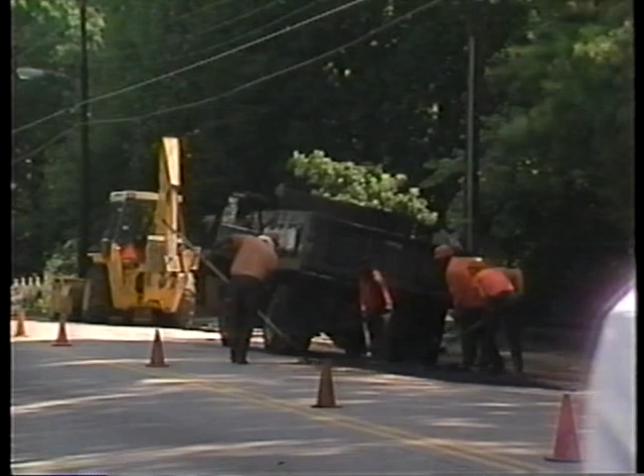Now, let's get started. Your safety and the safety of others is your primary concern when setting up traffic control. Whenever work is done on or near the roadway, drivers are suddenly faced with changing and unexpected conditions. If drivers are not properly warned of these changes, accidents can and will occur, so protective measures must be taken.

Liability is a second concern you should have when establishing a traffic control zone. Today, more than ever, work zone accidents are becoming courtroom lawsuits. These lawsuits usually result in large sums of money being awarded by public agencies to those injured. You should take note, though, that even employees are sometimes held liable for damages.

A third consideration when you're on the job is image. Not only is safety important at the work site, but so is the way the public sees you and your agency. A professional-looking work crew and properly installed traffic control devices will improve your agency's image and increase the traveling public's respect for your work zone.

So safety, liability, and image are 3 points you need to keep in mind when setting up traffic control at your work zone. You should also remember that drivers don't make distinctions between construction, maintenance, or utility operations, so we need proper traffic control for all types of work. Now, let's discuss some basic concepts that will help you do your job safely.

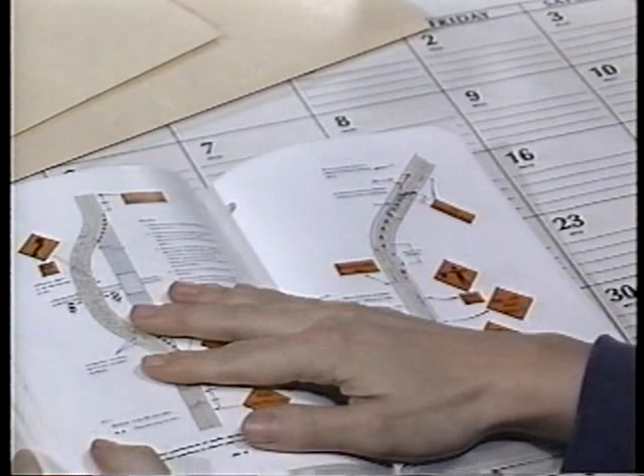To begin, you'll need access to the Manual on Uniform Traffic Control Devices. This manual is the national standard for all traffic control devices. It applies to all streets and highways open to public travel, and serves as the standard for state and local manuals. Part 6 covers traffic controls for street and highway construction, maintenance, utility, and incident management operations. It includes illustrations and layouts for several specific work zone applications.

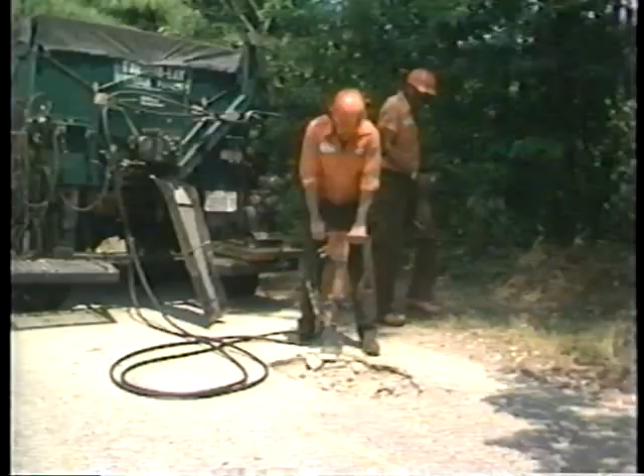Your state or local agency may have also prepared a supplemental manual showing additional specific applications and layouts. Many of the typical work sites you'll encounter are illustrated in the Manual on Uniform Traffic Control Devices. However, the manual does not cover every conceivable situation. Good engineering judgment must be used to determine the best traffic control for a particular work site. This will depend upon the type of work needed, the location and duration of work, the type of roadway, traffic volume and speed, and any potential hazards.

The principles which you should follow to improve the safety of motorists and workers in short-term work areas include the following. First, keep safety of motorists, pedestrians, and workers your top priority. Try to keep traffic conditions as normal as possible, and take the time to plan and install a traffic control scheme. Sometimes this may mean spending almost as much time setting up traffic control as you spend completing the work.

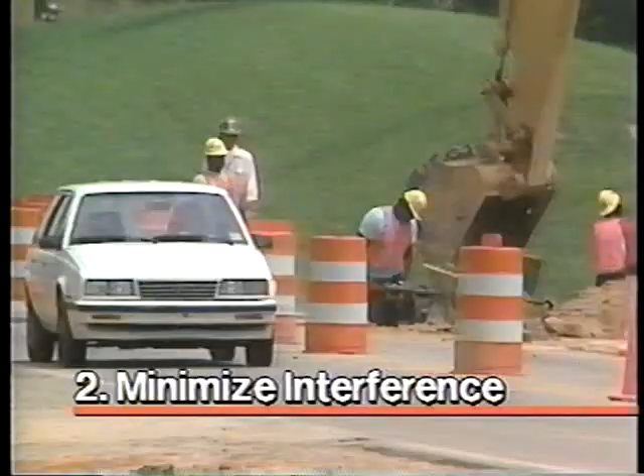Second, minimize interference with traffic movement. Try to maintain the safest maximum speed while eliminating abrupt lane closures. Also provide enough room for work equipment and vehicles inside of your work zone, and then open the roadway again as soon as possible.

Third, present a clear, easily understood message to drivers and pedestrians. This means knowing the exact meaning of each traffic control device that is used. It also means that any conflict in meaning between temporary control devices and those permanently in place must be resolved.

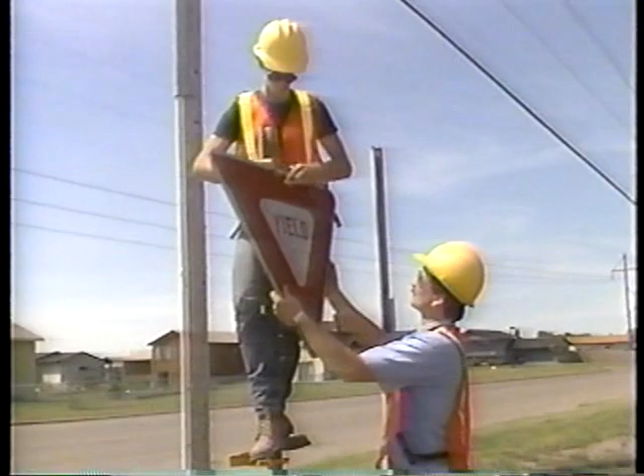For example, you may need to close a lane for maintenance. All of the normal road conditions may guide the driver into the closed lane. Therefore, a special effort must be made to overrule the regular message during the duration of the work.

Fourth, have a plan in mind before going to the work site. The foreman generally takes on responsibility for designing, installing, and maintaining the traffic control plan. This includes keeping the control devices in good repair and properly cleaned so that adequate visibility is maintained. As soon as the project is finished, you should promptly remove the traffic control devices.

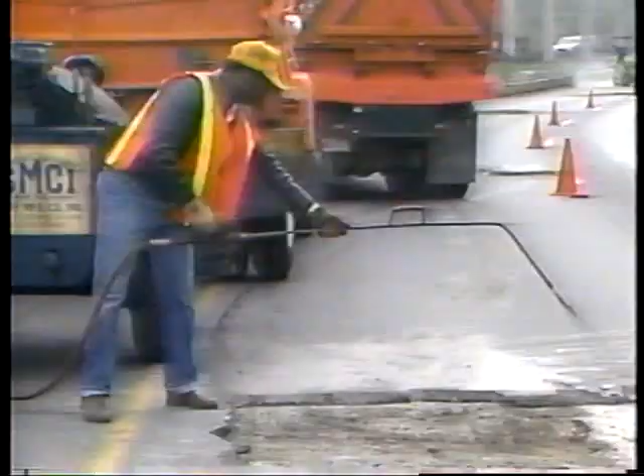Fifth and finally, anticipate the increased hazards caused by your presence on or near the roadway. Be sure to keep your equipment, materials, debris, and yourself out of the path of traffic. This means try to keep a clear roadside through the work area. Use traffic control devices that are lightweight and yielding to lessen vehicle damage.

The traffic control devices selected to assist motorists must satisfy a driver's need for information. You should carefully consider both the message and the placement of the traffic control devices. Inappropriate messages and incorrect placement of signs, markings, and other devices can mislead and confuse the motorist.

In work zones, there are 3 categories of messages which must be conveyed to the driver. These include the warning of potential hazards, information on safe speed, and the lane or shoulder over which a vehicle should be traveling.

Drivers have particular problems when traffic control devices give inaccurate information, do not conform to standards, or are improperly installed.

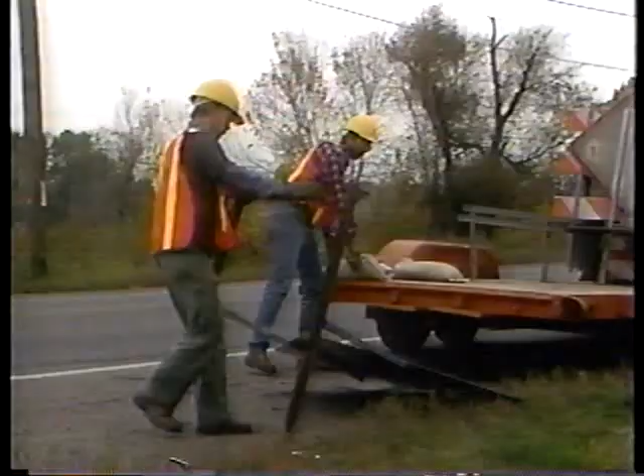Each person whose actions affect maintenance and construction zone safety should receive training. They must know the following principles. Keep the motorist's respect and the agency's credibility by presenting clean and well-maintained traffic control devices.

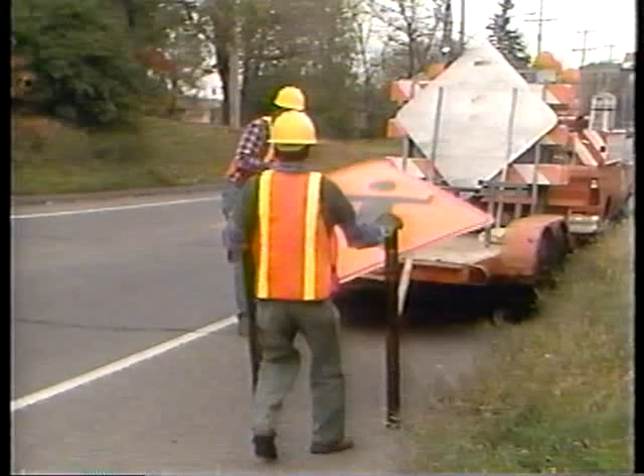If work is not in progress or a hazard is not there, take down, fold over, or cover the signs. Don't mislead the public. Remove channelizing devices when no longer needed. Don't tell drivers to expect a hazard that's not there. If you do, they may not believe other signs and devices used on the project. For example, don't use this sign unless flagging is actually taking place.

Put yourself in the driver's seat and see how the traffic control looks to you. Maintain the controls as if every driver were approaching the area for the first time, especially in short-term work sites.

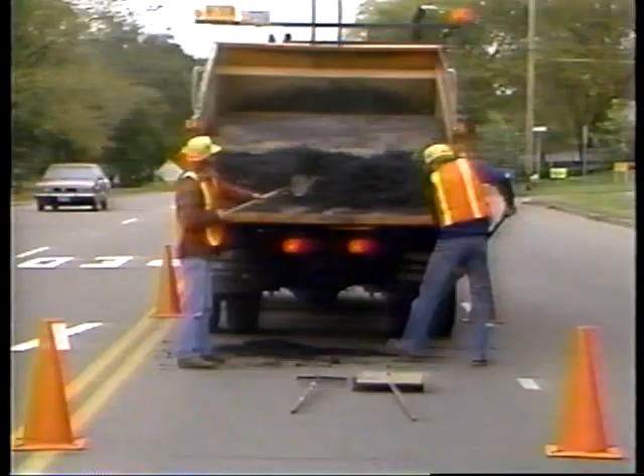Discuss and think about good work area traffic control. Help your co-workers perform their work with a minimum of exposure to traffic while watching for problems and reporting any damaged or missing devices.

Now, let's review what we've discussed in this introduction to work zone safety. Here are the main points to remember.

Part 6 of the Manual on Uniform Traffic Control Devices is the standard for traffic control in your work zones. It may be supplemented by state and local manuals, which should be consulted before setting up a work zone. Plan your traffic control before going to the work site. Good planning includes carrying the proper signs, cones, and other devices needed to safely do the job. Be sure they're clean and in good repair.

Only display those devices that are needed by the driver. If a work zone traffic control device is not needed, remove, cover, or lay it down as soon as possible. Don't mislead the public. Always ask yourself, how does it look to the unsuspecting driver approaching my work site? What's the driver's view?

We've taken a look at the reasons for proper traffic control and its relationship to safety in the work zones. Now, in the following parts, we'll be reviewing the concept of traffic control zones, the types and uses of traffic control devices, and we'll be reviewing some typical applications that you'll be using in your work.

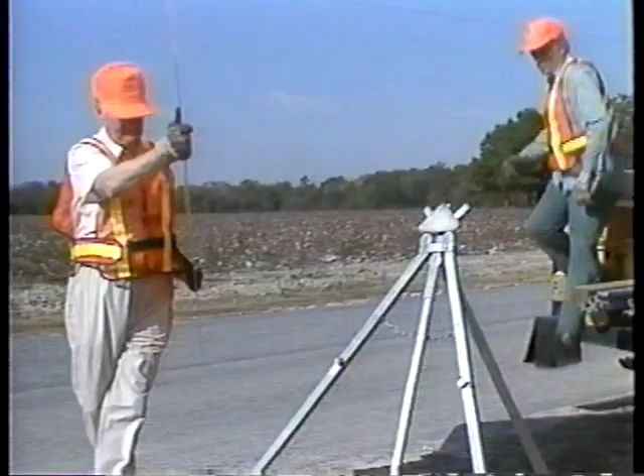At the beginning of the work area, start with an advanced road work ahead sign. Then use signs with more specific messages, with the most specific sign stating what action should be taken by the driver closest to the work area. Drivers sometimes forget what they're told, so the last sign in the advanced warning area should tell them specifically what to look for or expect, such as a flagger or a right lane closure ahead.

The message ahead is generally used on warning signs for short-term work sites. The overall effect of the signs should make the driver aware of what he or she is approaching and what action will be required.

In keeping with the Manual on Uniform Traffic Control Devices, a rule of thumb for spacing between signs in a series is 200 feet for low-speed city streets, 350 feet for high-speed urban roads, 500 feet for rural roads, and 1,000 to 2,640 feet for freeways and expressways.

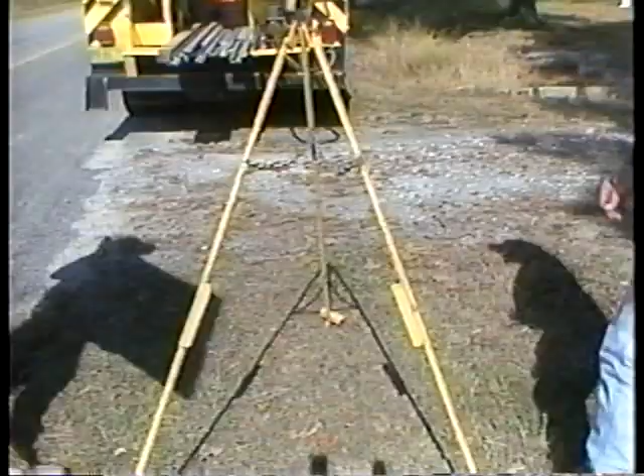Lightweight, yielding, or breakaway supports should be used for all sign installations. Sign installations should be reviewed to avoid any possible glare from vehicle headlights.

The minimum height requirements for signs attached to posts is shown. Signs on portable supports are required to be at least 1 foot above the roadway. All signs used at night are required by the Manual on Uniform Traffic Control Devices to be retroreflective or externally illuminated. Lighting from existing streetlights does not meet this requirement.

Pavement markings are very important in guiding traffic through work zones. Pavement markings, delineators, and channelizing devices outline the traffic path around a work area. Drivers use pavement markings as a primary means of guidance.

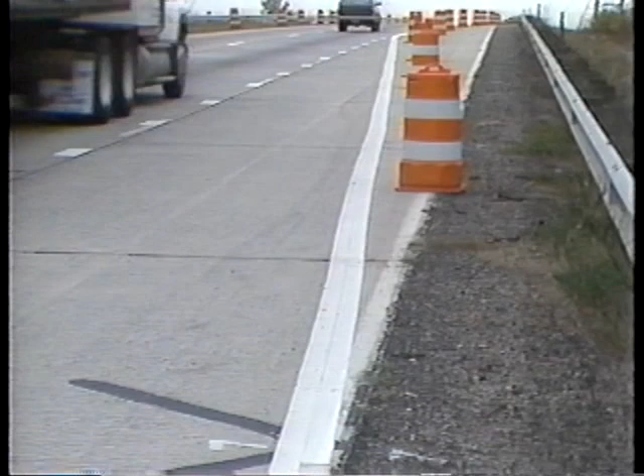The standard markings planned for the road should be in place before opening a new facility to traffic. Also, if revised lane patterns are planned for the work zone, interim markings should be placed before the traffic is changed. Where this is not feasible, such as during the process of making a traffic shift or carrying traffic through surfacing operations, temporary delineation may be accomplished with lines of traffic cones, other channelizing devices, or short strips of adhesive-backed retroreflectorized tape.

When pavement placed during the day is to be open to traffic at night, and permanent striping cannot be placed before the end of the workday, an interim stripe should be applied to indicate to the driver the location of the lane or center line.

Channelizing devices are used to warn and direct traffic away from or around a work area. They also control the flow of traffic when separating two directions of travel. They include barricades, barriers, vertical panels, cones, tubular markers, and drums. Each type has distinct visibility characteristics and advantages.

The Manual on Uniform Traffic Control Devices requires that channelizing devices used at night be retroreflectorized with a material having a smooth, sealed outer surface. This includes commercially available retroreflectorized sheeting and tape strips. It does not include the use of pavement marking tape.

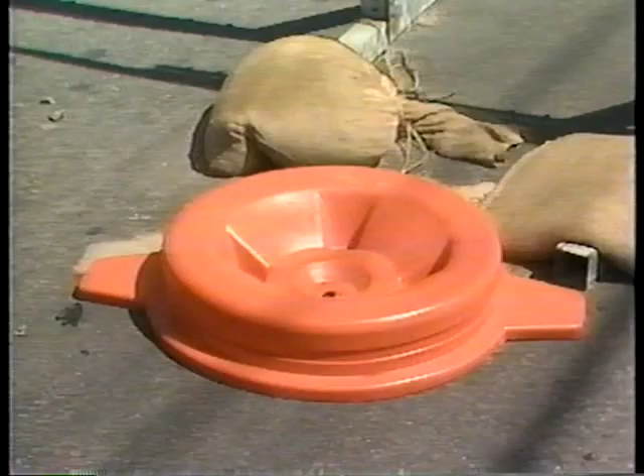Some devices are easily knocked down and require a weight, such as a sandbag. These weights must be placed at the bottom of the device for stability and to keep the weight from being thrown if hit. Neither the device nor the weight should cause excessive damage when struck. Sandbags should not be placed where they will be a hazard to the driver or limit the view of the device.

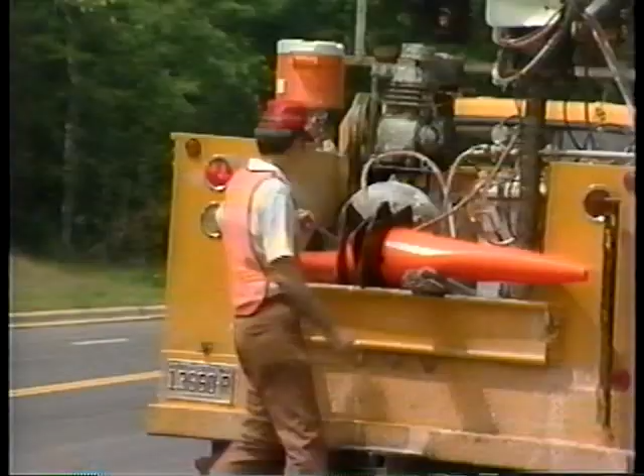Cones are lightweight channelizing devices that may be stacked for storage. They are easy to place and remove and are a minor impedance to traffic flow. For stability, a rubber or sand collar or a specially weighted base may be added. When purchasing cones, specifications may require 60% or more of the weight in the base, thus removing the need for extra base weights or collars.

Cones cause little or no damage when hit. They must be at least 18 inches high, but 28-inch cones must be used on freeways and other roadways where speeds are 45 miles an hour or greater. At night, 28-inch cones or larger must be used. 28-inch cones must have a 4-inch wide band, 2 inches below a 6-inch band. Any cone height less than 28 inches is not acceptable for nighttime use.

Using cones can have disadvantages because drivers have less respect for them, and cones can be easily displaced or knocked over unless properly ballasted. When cones are used, they should be checked periodically, and those that have either been displaced or knocked over should be reset.

Tubular markers are similar to cones in that they are lightweight, easy to install, and are a minor impedance to traffic flow. Tubular markers may be set in special weighted bases or fastened directly to the pavement. Because of their narrow size, they offer a particular advantage when forming new lanes or separating two-way traffic for a short-term activity.

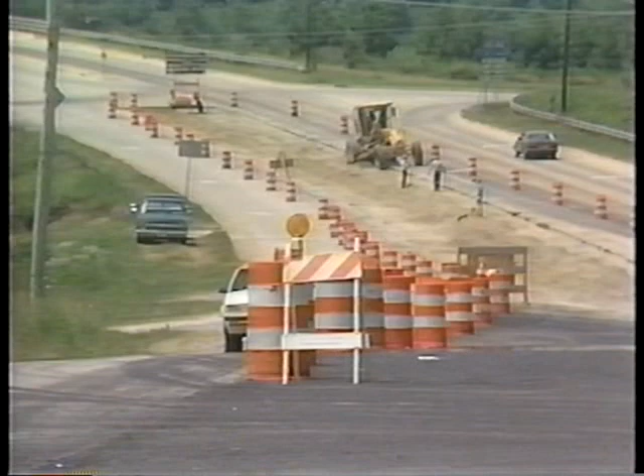Drums are used as either channelizing or warning devices. They are highly visible, give the appearance of being formidable objects, and therefore command the respect of drivers. Plastic, not metal drums, shall be used.

The Manual on Uniform Traffic Control Devices requires that markings on a drum be horizontal orange and white stripes that are retroreflectorized 4 to 6 inches wide.

The drum must have at least 2 sets of orange and white stripes, but can have non-retroreflectorized spaces up to 2 inches wide between the stripes.

Drums must have a minimum width of 18 inches, regardless of orientation, and their tops shall be closed.

Plastic drums can be nested, allowing for easy transport and storage. Many of the commercially available plastic drums have 1 or more flat sides to prevent rolling and have flanges or recesses for warning lights.

Barricades should be constructed of lightweight materials and are classified as types 1, 2, and 3. The type is determined by the number of retroreflectorized rails facing traffic.

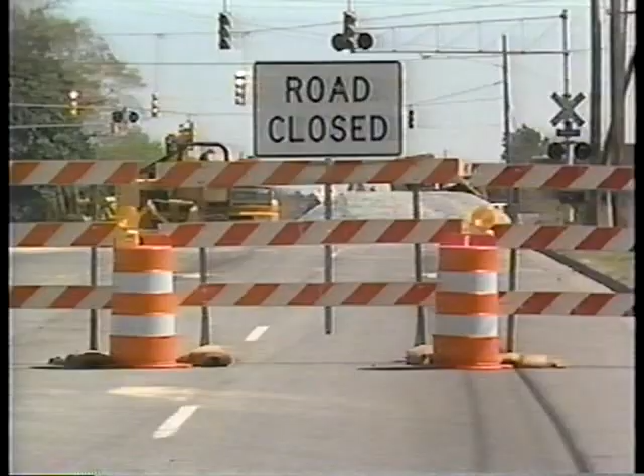Types 1 and 2 are portable and can be used for either channelizing or marking hazards. Type 3 barricades are used for road closures.

Types 1 and 2 often have rails on both sides and may be used to separate opposing lanes of traffic. The rails have alternating orange and white retroreflectorized stripes that slope down toward the side traffic is to pass.

For road closures, a road closed sign and a detour sign, if needed, may be mounted on a Type 3 barricade. If local traffic will be allowed to use the closed roadway, then the local traffic only sign should be mounted on the barricade.

The terms barrier and barricade are frequently confused. A barricade indicates the location of a hazard or a desired path a motorist should take. On the other hand, a barrier provides a positive physical separation between traffic and the work area or between opposing streams of traffic.

High-level warning devices are tall portable stands with flags that are visible above the traffic and parked cars. They have a minimum of 2 orange flags, 16 inches square or larger, at least 8 feet above the roadway.

The devices may be used with a sign or flashing light attached, or they may be attached to vehicles used in mobile work operations.

Most of the warning lights in use are portable, lens-directed enclosed units and may be used on channelizing devices, barricades, and signs. These are the principal types and uses of warning lights.

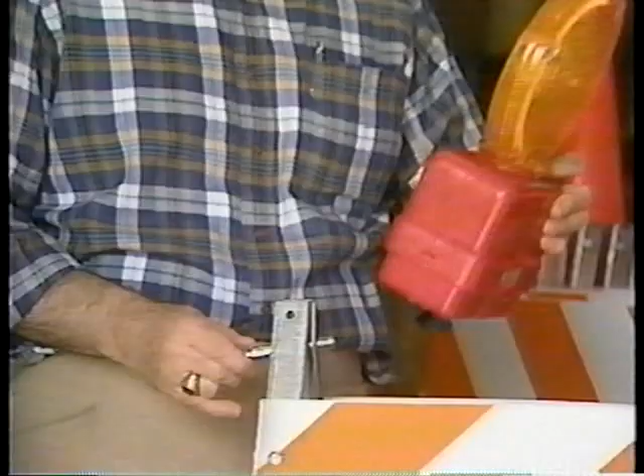Warning lights should be secured in such a way that they'll not separate from the channelizing device or sign when hit by a vehicle. Warning lights that come loose during an accident may become dangerous flying objects.

Work vehicles in or near the traffic areas are hazards and should be equipped with flashing lights. The vehicle warning may be emergency flashers, flashing, strobe, or rotating beacons.

High-intensity lights are effective both day and night. The flashing lights should meet the requirements of the agency that has jurisdiction over the street or highway. These lights should be used in addition to other channelizing and warning devices.

However, in some emergency situations where the work may be in progress for a very short time, these lights may be the only warning device.

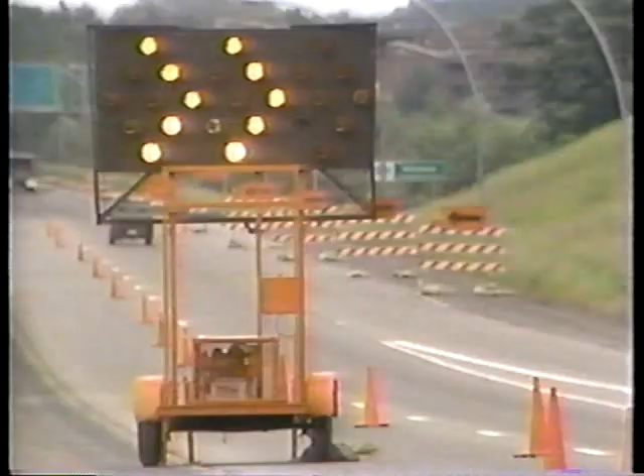Arrow displays are signs with a matrix of lights capable of either flashing or sequential displays. They are used for moving traffic out of a lane and may be used at tapered lane closures and with mobile operations. They are not a substitute for a lane closure taper.

There are two types of arrow displays: flashing and sequencing.

Arrow displays have four basic operating modes: left arrow, right arrow, left and right arrow,

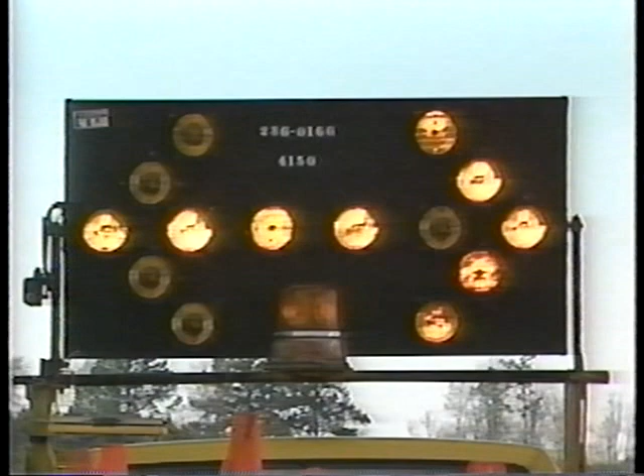and caution mode, with 4 lamps arranged in the 4 corners of the panel.

Flashing arrows must never be used on 2-lane roadways because traffic may be directed into a head-on collision. Arrow displays on 2-lane roads can only be used in the caution mode.

Flashing hazard identification beacons are used in work areas, both day and night, to alert drivers of a critical point in the highway, such as a truck crossing, and have the same meaning as permanently mounted beacons. Flashing beacons are not used for channelization.

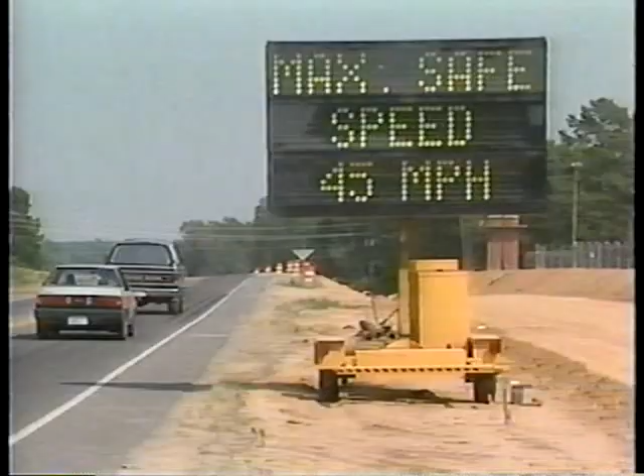Portable changeable message signs capable of displaying various messages to the motorist will sometimes help construction zone signing. These devices are normally trailer or truck mounted and have their own power system. Because they're expensive to buy and operate, changeable message signs are normally used for the more complex traffic control plans.

When using a changeable message sign, be sure the message is clear. A lengthy message may distract the motorist too long. The word order in a message can also cause problems. For example, 'right lane closed, merge' would get a different driver response than 'lane closed, merge right.' Yet the messages are similar, except for the beginning point.

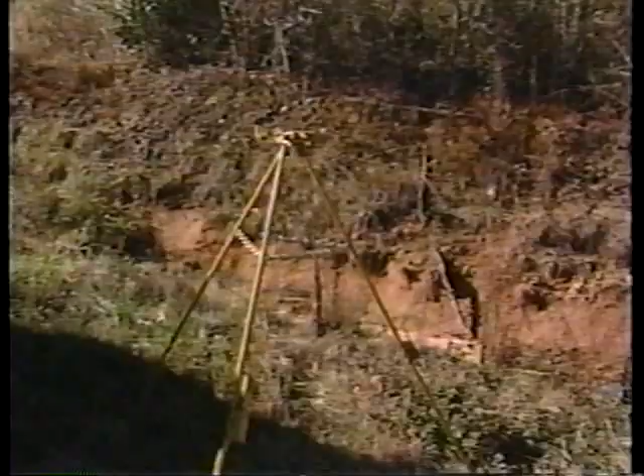This concludes our brief review of traffic control devices. Particular details will be found in the Manual on Uniform Traffic Control Devices. Now, in the following section, we'll be discussing the concepts and elements of traffic control zones.

When traffic is affected by construction, maintenance, or utility operations, traffic control is needed to safely guide and protect motorists, pedestrians, and workers in and through work zones. This zone is the area between the first advance warning sign and the point beyond the work where traffic is no longer affected. Most temporary traffic control zones can be divided into 4 areas.

In this part of the training, we'll look at each of the areas and examine them for one direction of travel. If the work you'll be doing affects more than one direction of travel, the same principles we cover here will apply to traffic in all directions.

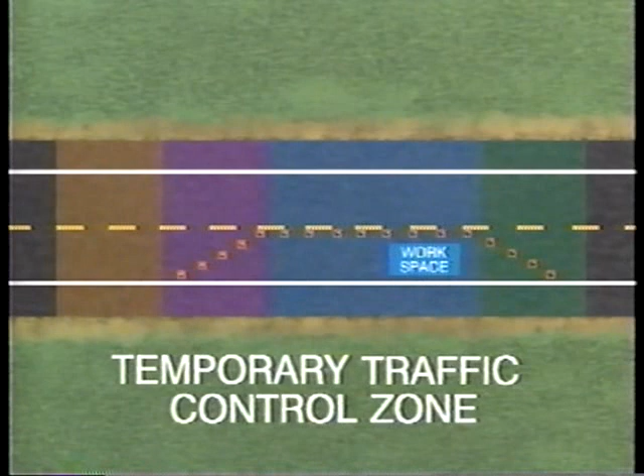These are the 4 areas of temporary traffic control zones we'll be discussing. Accidents can occur in all of these areas if they are not properly controlled: advance warning area, transition area, activity area, and termination area.

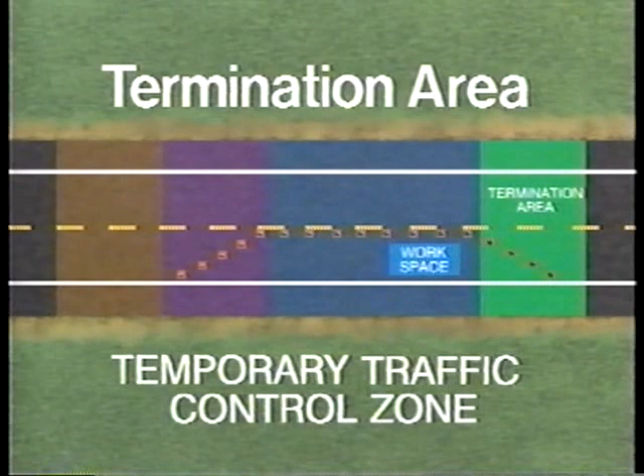The advance warning area prepares drivers and alerts them to what's coming. An advance warning area is necessary for all traffic control zones because drivers need to know what to expect. Before reaching the work area, drivers should have enough time to adjust their driving patterns. In the advance warning area, traffic control devices may vary from a series of signs starting a mile in advance of the work area to a single sign or flashing lights on a vehicle.

The advance warning area, from the first sign to the start of the transition area, should be long enough to give the motorist enough time to respond to the control devices. For most operations, the length can be 1 mile for freeways or expressways, 1,500 feet for most other roadways or open highway conditions, or 1 block or more for urban streets.

Next is the transition area. When work is performed within 1 or more traveled lanes, a lane closure is generally required. In the transition area, traffic is channeled from the normal highway lanes to a new path, which is required to move traffic around the activity area. Most often, this is accomplished with tapers to close the lanes.

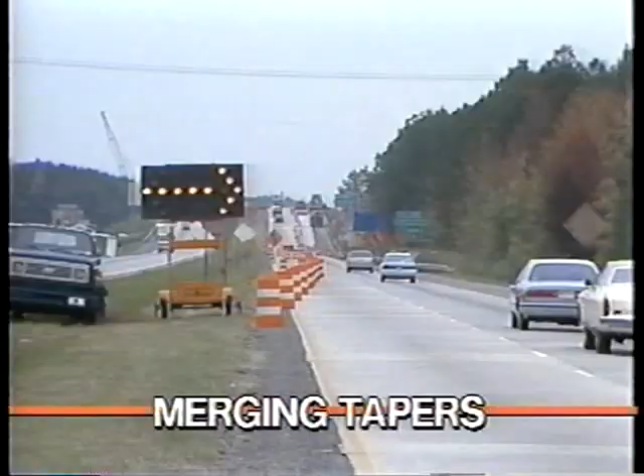A taper is a series of channelizing devices placed at an angle to move traffic out of its normal path. There are 5 general types of tapers used in traffic control zones. Merging tapers close a lane of moving traffic on multi-lane highways where a merge is required. The spacing for channelizing devices should not be greater than the speed limit.

Lane shift tapers move traffic to a different lane where a merge is not required. Shoulder closure tapers are needed to close shoulder areas. Two-way tapers control two-way traffic where drivers are required to alternately use a single lane; these tapers are used when flaggers are present. Downstream tapers are those installed to allow traffic back into the normal path.

The length of each type of taper is very important and is determined by several factors. Let's look at each of these factors in more detail.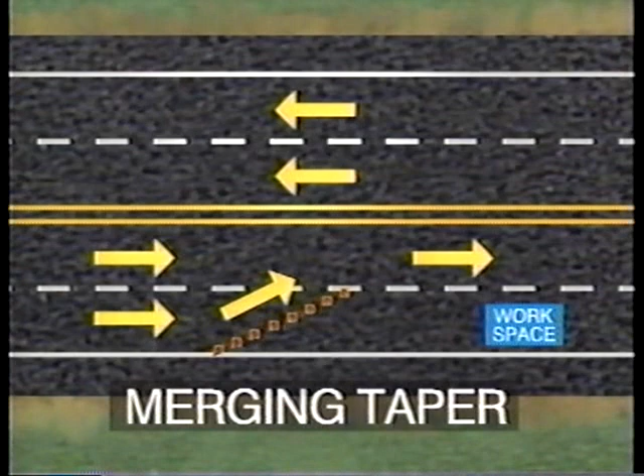The length of a merging taper, which is used to close a lane, is determined by the speed of traffic and the width of the lane to be closed. The 2 formulas for determining the length of tapers for lane closures are discussed in the Manual on Uniform Traffic Control Devices. For speeds of 45 miles per hour or greater, the merging taper length should be at least the width of the lane multiplied by the posted speed or the observed operating speed.

For speeds of 40 miles per hour or less, the length of the taper should be at least the product of the width of the lane times the square of the posted speed, divided by 60. This is actually the high-speed taper multiplied by the factor of the posted speed divided by 60. In most tables, the equation is shown like this.

Most state and local manuals include tables showing the required taper lengths for various speeds and lane widths. For example, a 40-mile-per-hour posted speed and an 11-foot lane requires a 295-foot merging taper.

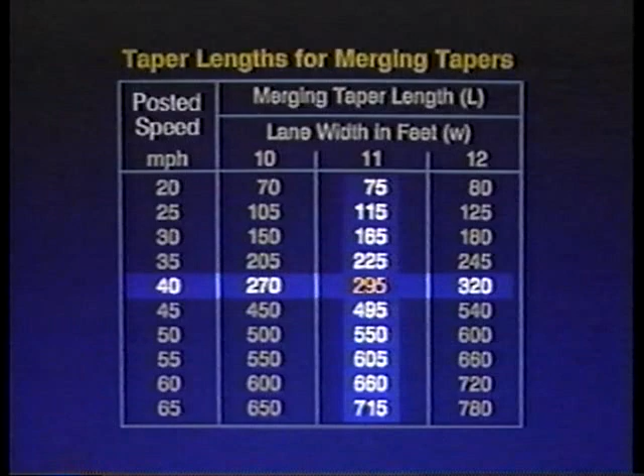The lane shift taper is used when traffic is only being shifted and no merge is required. Therefore, the taper does not have to be as long as a merging taper. The minimum taper length is 1/2 L, where L is the computed length of a merging taper for the given posted speed and width of the lane shift.

When an improved shoulder having a width of 8 feet or more is closed on a high-speed roadway, it should be treated as a closed part of the roadway. This is because drivers expect to be able to use the shoulder in the event of an emergency. The shoulder taper should be 1/3 L, where L is the shoulder width multiplied by the posted speed. If the shoulder is used as a travel lane, however, the taper is equal to L.

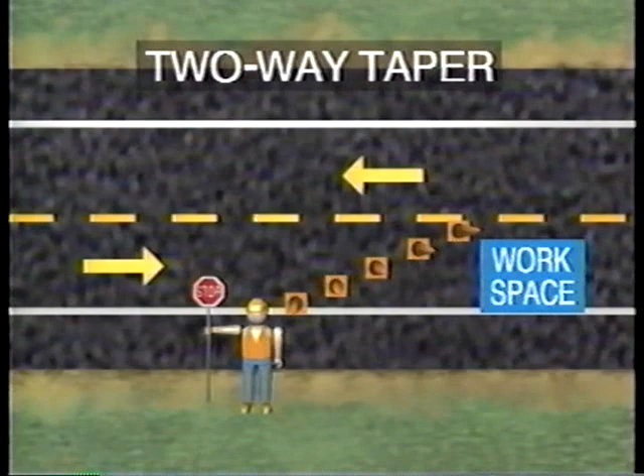The two-way traffic taper is used in advance of a work area that occupies part of a two-way road when the remainder of the road is used alternately by traffic in either direction. A short taper is used to slow down traffic by giving the appearance of restricted alignment. One or more flaggers or temporary traffic signals are used to assign the right-of-way in such conditions. Two-way traffic tapers should be a maximum of 100 feet long, with channelizing devices spaced at a maximum of 20 feet to provide clear delineation of the taper.

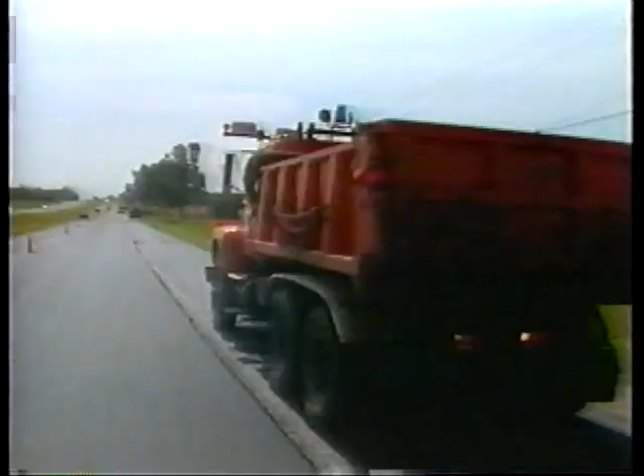A downstream taper is used at the downstream end of the work to allow drivers back into the lane that was closed. It's placed in the termination area. While closing tapers are optional, they may be useful in smoothing traffic flow. However, they may not be advisable when material trucks move into the work area by backing up from the downstream end. If a closing taper is used, it should be at least 100 feet in length per lane.

Here is a table from the Manual on Uniform Traffic Control Devices that shows the lengths for the 5 types of tapers.

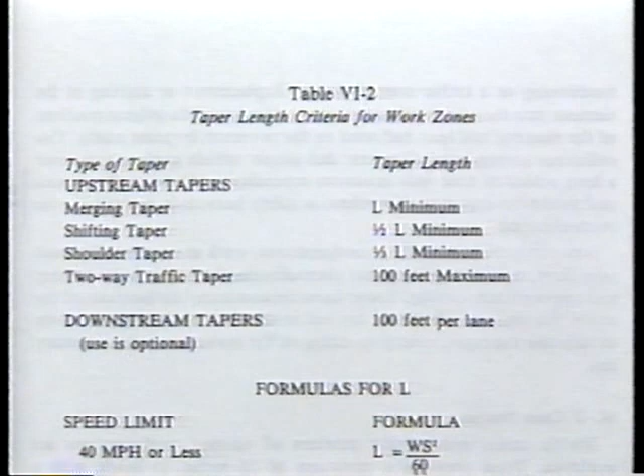Let's briefly review tapers and taper lengths. Where traffic on a multi-lane highway must merge, the required length is a function of the speed limit and the lane width. If traffic on a multi-lane road is to be shifted to a different lane, the taper is 1/2 the length of the merging taper length.

When working on an improved shoulder, the required taper length is 1/3 of the merging taper length. Now, when traffic is on a two-way road and it's reduced to one lane, a taper with a maximum length of 100 feet is needed. And to let the driver know that he may return to the closed portion of the roadway, a 100-foot taper may be used.

If restricted sight distance is a problem, for example, a sharp vertical or horizontal curve, the taper should be moved well in advance of the obstructed view. Beginnings of tapers should never be hidden behind curves.

Traffic should be observed to see if the taper is working correctly. Frequent use of brakes and evidence of skid markings are indications that either the taper is too short or the advance warning is inadequate.

The activity area consists of 4 distinct spaces. They are the longitudinal and lateral buffer spaces, the workspace, and the traffic space.

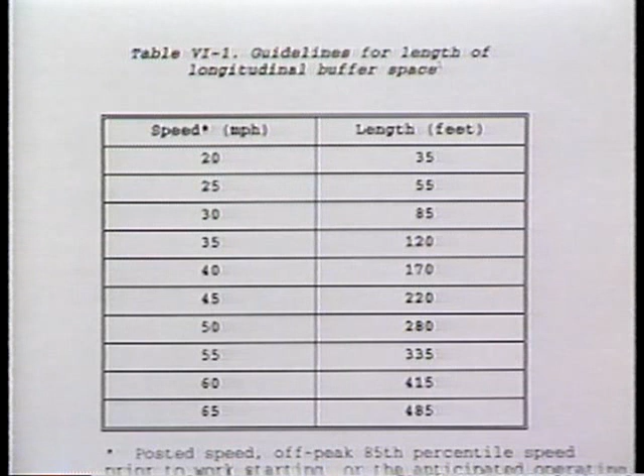The length of the longitudinal buffer space is based on the stopping distance for the speed being considered. Table 6-1 of the Manual on Uniform Traffic Control Devices provides guidelines for the length of buffer spaces for various speeds. It is measured from the end of the transition area to the beginning of the workspace.

Situations occur where one lane of traffic uses a lane that normally flows in the opposite direction. In these situations, a longitudinal buffer space should be used to separate the 2 tapers for the opposing directions of traffic to help prevent head-on collisions.

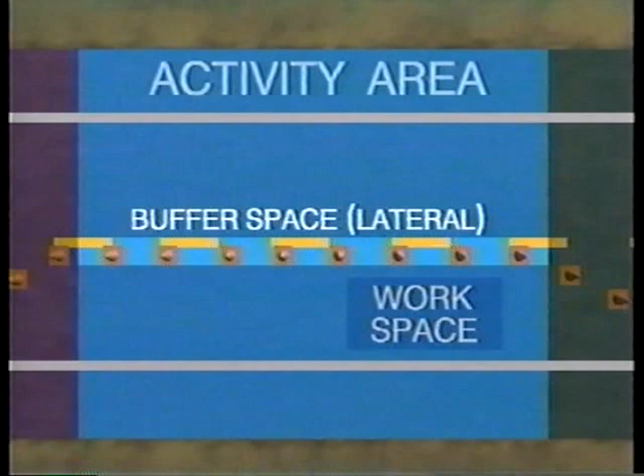Lateral buffer spaces separate moving traffic from the workspace as well as opposing streams of traffic. The width of this space is determined by engineering judgment and is often governed by the portion of the roadway which is needed to perform the actual work.

The workspace is that portion of the roadway which contains the work activity. It is closed to traffic and set aside for exclusive use by workers, equipment, and the storage of construction materials. Workspaces may remain in fixed locations or may move as work progresses. For long-term operations, the workspace may be shielded by barriers to exclude traffic and pedestrians.

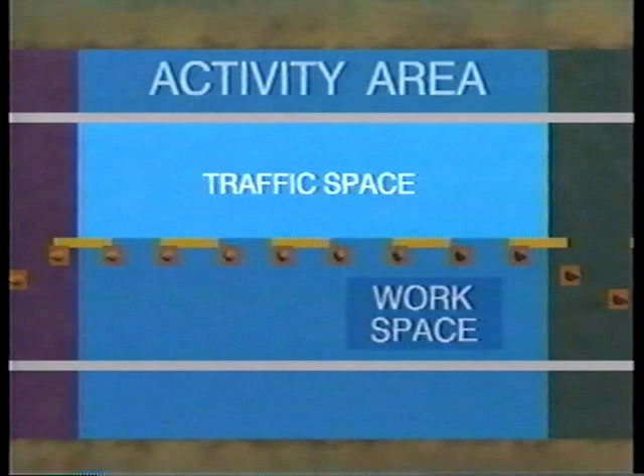The traffic space is the portion of the roadway in which traffic is routed through the activity area. Channelizing devices are used to separate the traffic space from the work activity at a spacing no greater than twice the posted speed limit. Every feasible effort should be made to minimize traffic conflicts with the work area. These are suggestions.

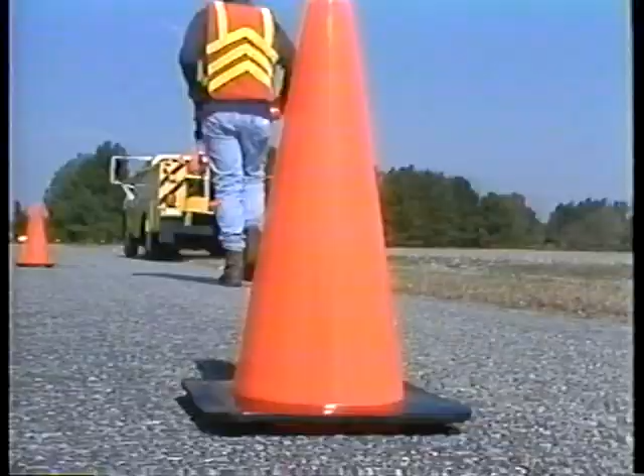Use traffic control devices to make the travel path clearly visible to drivers. For nighttime operations, the traffic control devices must be retroreflectorized and have a large surface area. Place channelizing devices between the work area and the traveled way. Provide safe entrances and exits for work vehicles. Flags and flashing lights should be considered on work vehicles exposed to traffic, and a truck-mounted attenuator be provided whenever possible to protect work crews.

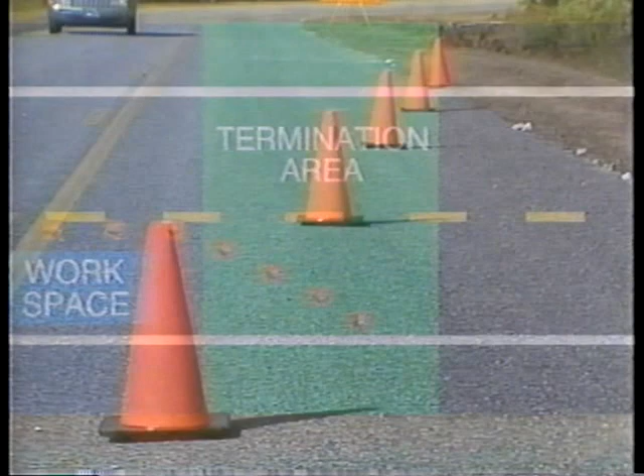The termination area provides a short distance for traffic to clear the activity area and return to the normal traffic lanes. It extends from the downstream end of the activity area to the End Road Work sign. A downstream taper may be placed in the termination area.

For some work operations, such as a single location utility or maintenance repair, it may not be necessary to display an End Road Work sign because it will be obvious to drivers that they have passed the activity area. Avoid gaps in the traffic control at work zones that may falsely indicate to drivers that they have passed the activity area. For example, if the work includes intermittent activity throughout a 1-mile section, drivers should be reminded periodically that they are still in the work zone.

The primary purpose of the guide sign, Road Work Next Miles, is to inform the driver of the length of the work zone. It should not be erected until work begins.

In mobile operations, the advance warning area may be provided by signs and flashing lights on the work vehicle. Additional advance warning signs may be warranted depending on the volume and speed of the traffic. A shadow vehicle equipped with an arrow display and flashing lights may also be used.

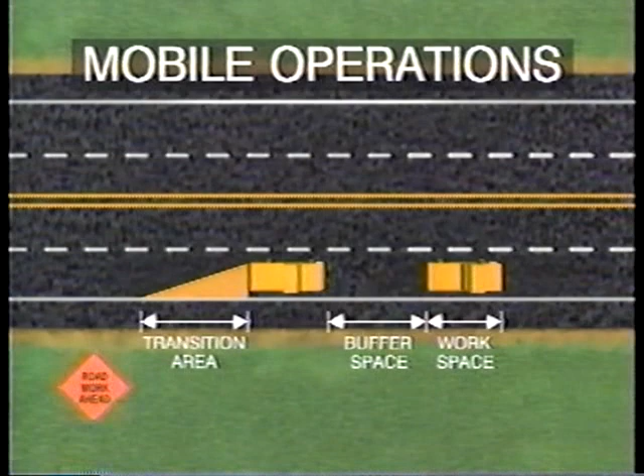With mobile operations, the transition area actually moves with the activity area, and the buffer space is the area between the shadow vehicle, if one is used, and the work crew. The termination area is usually obvious to the driver passing the work vehicle. The use of a truck-mounted attenuator should be considered for mobile operations.

As a review, these are the 4 parts of a traffic control zone. The advance warning area alerts the driver that there's something ahead that demands his close attention. In the transition area, traffic is shifted or moved to eliminate interference with work activities. The length of the taper should be computed or obtained from a table.

The activity area is set aside for the actual work to be performed, to provide for the movement of through traffic, and to offer a margin of safety for both workers and motorists. And the termination area tells the motorist that they are out of the construction area and may resume normal driving. This concludes the review of the 4 basic parts of a temporary traffic control zone and their function. In the next session of the series, we'll be reviewing some typical applications that you'll be using in your work.

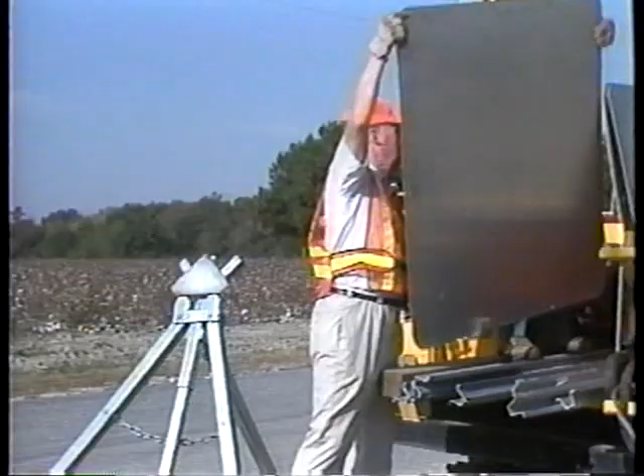You are probably most vulnerable during the installation of the traffic control devices. To minimize this hazard, install the devices before work begins, starting with the first device the driver will see when approaching the area. Then continue installing devices, advancing toward the work area.

To evaluate any work zone traffic control, drive through the work zone after all the devices are in place. Difficult as it is, put yourself in the place of the unfamiliar driver, the one who's not anticipating that you're in the roadway.

If the traffic control scheme gives the driver the necessary warning and guidance, you and your co-workers will be providing the best protection for yourselves while working on or near the roadway.

As soon as the work is completed, remove the traffic control devices in the reverse order of installation, starting with the termination area and proceeding back to the first device installed. A good technique for removing the control devices is to first place them on the shoulder of the roadway and then pick them up in the direction of traffic flow.

The best way to illustrate these principles is to show the installation of the control scheme for some common types of operations.

In the first example, the work is entirely beyond the shoulder or parking lane. Traffic control will generally consist of flashing vehicle lights and flags. An advance warning sign should be used when the work will interfere with traffic in any way.

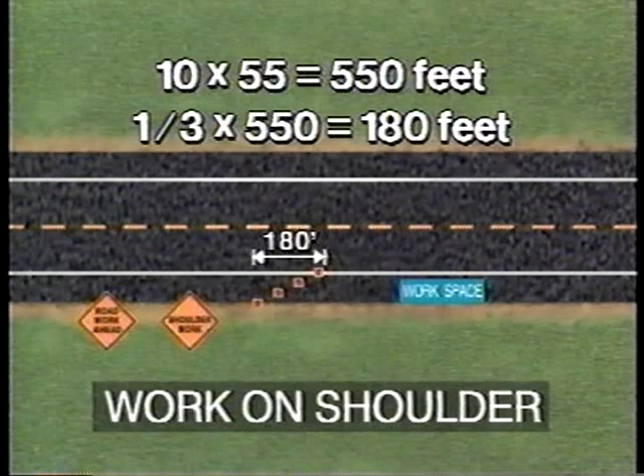Remember that the lane closure taper length is the product of the lane width and posted speed limit for speeds over 45 miles per hour. Let's assume a 55-mile-per-hour posted speed and a 10-foot shoulder. The lane closure taper would be 10 times 55, or 550 feet. The shoulder closure taper is therefore 1/3 of this, or approximately 180 feet.

A buffer space should be provided in advance of the workspace. When work is on the shoulder or takes up part of a lane, traffic volumes, types of traffic—this could be buses, trucks, and cars—speed and capacity should be analyzed to determine whether the affected lane should be closed. Now, the lane should not be reduced to less than 10 feet. You can consult Part 6 of the Manual on Uniform Traffic Control Devices.

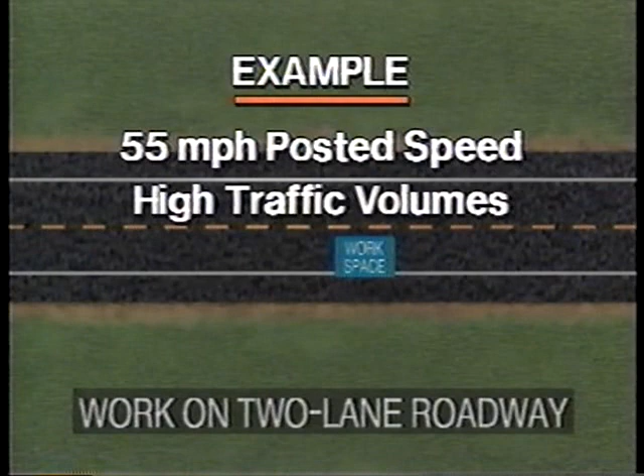When it is necessary to close one lane of a two-lane, two-way road, the remaining lane must be used by traffic traveling in both directions. For this example, the speed limit is 55 miles per hour, and the highway is a major arterial route with relatively high traffic volumes. This makes it necessary to use 2 flaggers and to install the 3 advance warning signs 500 feet apart.

First, install the Road Work Ahead sign for the unobstructed roadway. This sign is placed at least 1,700 feet in advance of the workspace. The second sign, "One Lane Road Ahead," is placed 500 feet from the first sign. The last sign installed, the flagger symbol, is placed 500 feet from the second sign.

The first flagger then assumes his or her station 500 feet from the flagger sign, placing the first flagger at least 200 feet from the beginning of the workspace.

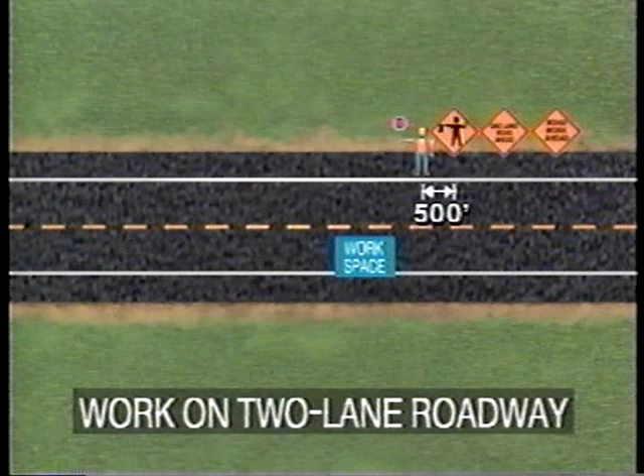The same series of signs are then installed on the side of the roadway on which the work is being done, again starting with a Road Work Ahead sign 2,000 feet from the workspace, a one-lane road sign at 500 feet, a flagger symbol at another 500 feet, and finally the flagger 500 feet beyond the last sign. At this time, the 2 flaggers begin controlling traffic through the one-lane section.

Next, install a 100-foot taper made up of 5 or more channelizing devices. A 400-foot buffer space and the workspace are then outlined with channelizing devices, spaced at approximately 100-foot intervals. The work vehicle may then be moved into the closed lane at the end of the buffer space. The 100-foot downstream taper is then installed at the end of the workspace. Finally, the end roadwork sign is placed 500 feet from the workspace and completes the work zone.

As previously emphasized, the best way to evaluate traffic control is to drive through the work zone after all the devices are in place. Now the work activity may begin.

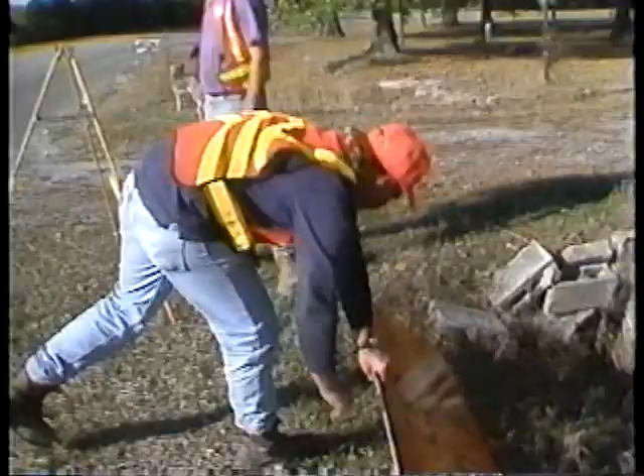After the project is completed and all workers, materials, and equipment are off the roadway, the traffic control devices are removed in reverse order of installation. Remember, a good technique for removing the devices is to first place them on the shoulder of the roadway, then pick them up in the direction of traffic flow.

The next example is an urban undivided 4-lane roadway. The work being done makes it necessary to close the right lane of the roadway. If the left lane were to be closed, the layout would be reversed.

If the posted speed is 35 miles per hour with 12-foot lanes, then the required lane closure taper would be 12 times 35 times 35 divided by 60, which equals 245 feet. We'll round it to 250 feet.

The first sign installed for the unobstructed roadway is a roadwork ahead sign. This sign is placed 200 feet in advance of the workspace.

The signs for the roadway on which work is taking place are then installed. The roadwork ahead sign is placed 970 feet before the workspace. The next sign is a right lane closed sign, 200 feet from the roadwork ahead sign. Then we place a lane reduction transition sign 200 feet from the right lane closed sign.

Now that all of the advanced warning signs are in place, it is recommended that you install an advanced warning flashing arrow display. This is done to give you, the worker, added protection while setting up the taper.

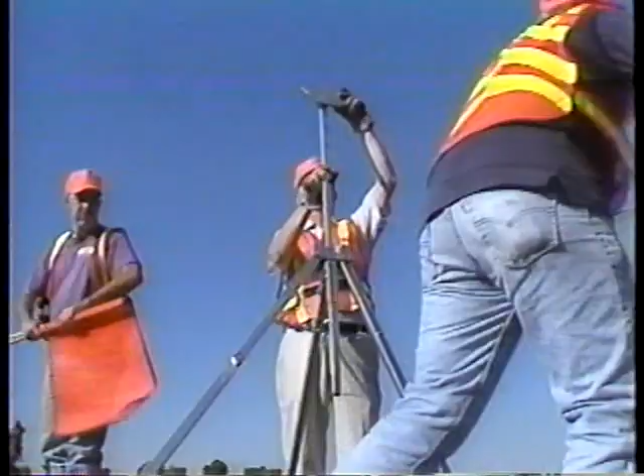The next example will be on a high-speed divided multi-lane highway, where the work being done requires the right lane to be closed. The first element installed is the advance warning area, approximately 1 1/4 miles in advance of the workspace. In the previous examples, the advance signs were installed only to the right of the approaching traffic.

However, for one-way multi-lane roadways, the advance signs are generally installed on both the left and right sides of the roadway. The first 2 signs installed are the 2 roadwork ahead signs, 1 1/4 miles before the workspace on both sides of the roadway.

Next, 2 right lane closed signs are placed 1/2 mile from the first signs, again 1 on each side of the roadway.

Third, a pair of lane reduction transition signs. These signs are placed 1,600 feet from the right lane closed sign.

Next, 1,000 feet from the lane transition sign, install the second element of traffic control, the lane closure taper. When setting up the taper, it is good practice to place your work vehicle or advance warning arrow display before the start of the taper for added protection.

With a 55 mph posted speed and 12-foot lanes, the taper should be 55 times 12, or 660 feet long. For this example, the lane closure taper consists of 13 channelizing devices on 55-foot centers for a total of 660 feet.

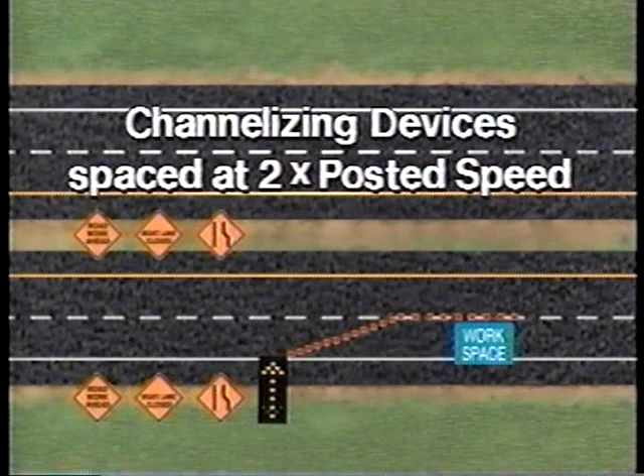A 335-foot buffer space and the workspace are outlined by channelizing devices spaced 2 times the posted speed. For 55 miles per hour, the spacing would be 110 feet.

The next element installed is a downstream taper, 100 feet minimum. The last element, the end roadwork sign, is then installed 500 feet from the workspace.

Finally, the work vehicle can be moved into the workspace. Again, evaluate traffic controls by driving through the work zone after all the devices are in place.

Remember to put yourself in the place of the unfamiliar driver, the one who is not anticipating your presence on the roadway. Now the work activity may begin.

After the project is completed and all workers, materials, and equipment are off the roadway, the traffic control devices are removed in reverse order of installation.

Finally, let's look at mobile operations. Generally, this work uses a moving vehicle train with occasional stops of less than 15 minutes. Mobile operations should be used only during daylight hours and at locations that offer good visibility.

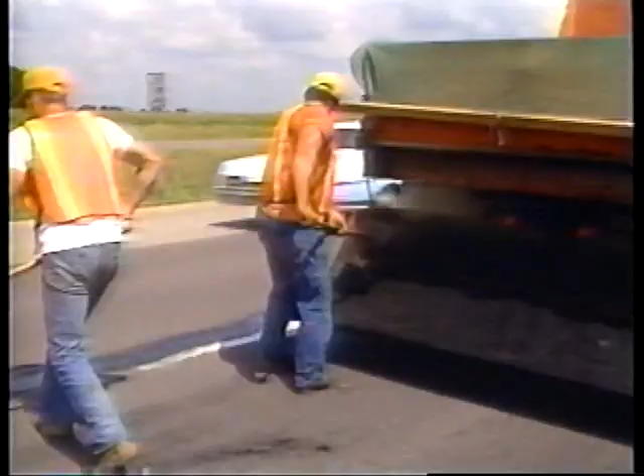When the sight distance is restricted approaching a mobile operation on a 2-lane roadway, a flagger should be used to protect the workers and to warn the driver.

Traffic control for a mobile operation should include warning signs, flags, flashing vehicle lights, channelizing devices, and protection vehicles. Arrow displays should also be used, except on 2-lane roadways.

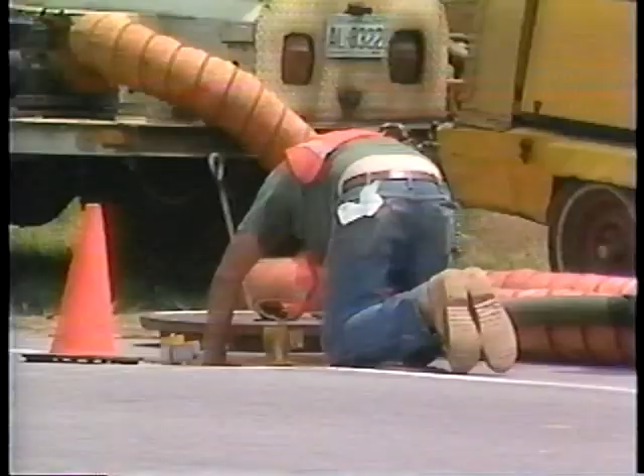Despite the brevity of short-term operations, certain traffic controls are necessary. In urban areas, the work vehicle may be used for warning if it's equipped with flashing lights, rotating beacons, or flags. When it's necessary to enter or leave a manhole, workers should always station a work vehicle upstream from the manhole. Materials or equipment should be stored away from the manhole opening. These principles apply to utility work zones and are just as mandatory as those in roadway work.

We have briefly reviewed a few examples of layouts under a number of different conditions. This small number cannot nearly begin to address all the possible situations you'll encounter. You'll often be called upon to develop your own traffic control plan, providing safety for both workers and drivers. While this task may be time-consuming, it is part of your responsibility that can never be set aside because of the urgency to get on with the job.

Your safety, the safety of your fellow workers, and the safety of the driving public will depend on you performing your flagging duties properly. An effective flagging operation is not something that just happens. It's the result of planning, proper training, and the use of good flagging procedures. This program was developed to help prepare you to be a flagger.

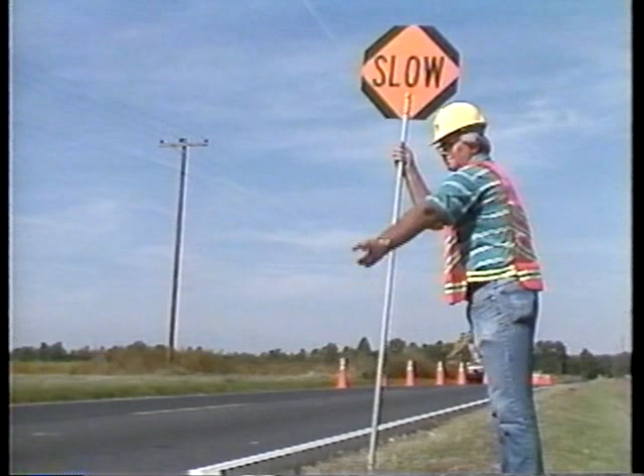The second way to release traffic is from the open lane. After the road is clear ahead, display the slow paddle to the drivers. With your free arm, motion the drivers to proceed. Again, be direct and deliberate in your motions.

In some cases, you may not need to stop traffic, but only slow it down. In these cases, always stand on the shoulder of the road. Display the slow paddle to oncoming traffic. Use your free arm to motion traffic to slow down. Remember, never stand in the path of oncoming traffic.

If you learn these 3 basic skills, you'll be well prepared for any flagging operation. Situations will vary, and how you apply these skills will differ from project to project. Remember, never start any flagging operation until advance warning signs are in place. These signs tell the driver that you're controlling traffic ahead. Without these advance warning signs, the driver does not expect you to be in the roadway.

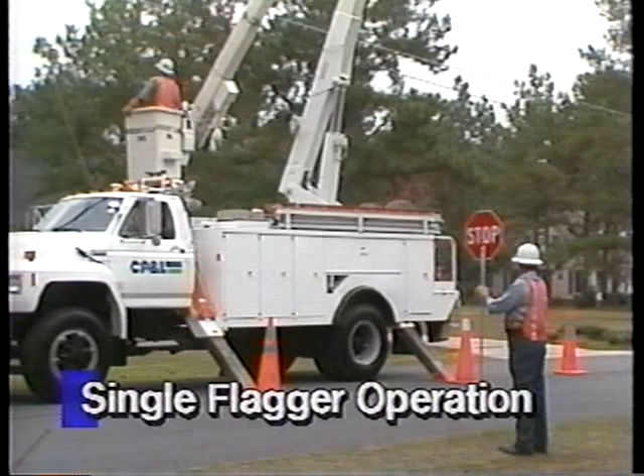Now, let's look at some typical situations a flagger may face. The first situation is a single flagger operation. Sometimes only one flagger is needed to control traffic on a low-volume two-lane road. Where only one flagger is used, the work area must be short and on a straight section of roadway.

The flagger must be visible to approaching traffic from both directions. In a single flagger operation, the flagger stands on the shoulder directly across from the work area, so that he or she is visible to traffic approaching from either direction. Then the flagger can assign right-of-way with the paddle. Remember, a single flagger operation is only acceptable for low-volume conditions where there is good sight distance from both approaches and the work area is short.

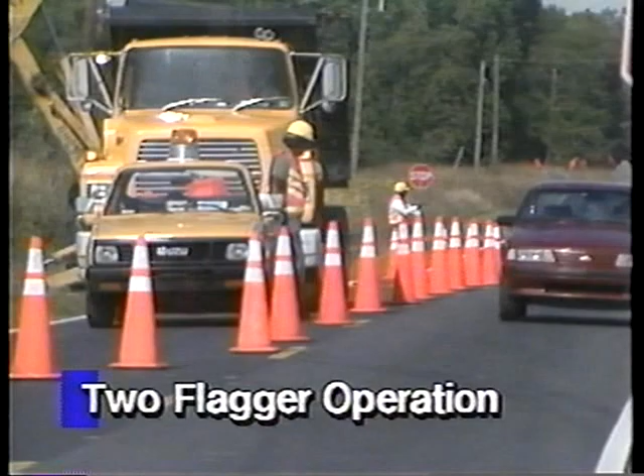The second situation, probably the most common, is the two-flagger operation. When two flaggers are used, they must always be able to communicate with one another. This can be done by keeping visual contact, using radios, or using the flag-carrying method. In these cases, one flagger is always in charge of the operation. If visual contact is possible in the work zone, then the operation normally works like this.

One flagger displays the stop paddle and stops traffic, while the second flagger displays the slow paddle and releases traffic. The first flagger continues to display the stop paddle and stop all traffic until the second flagger turns his paddle to stop and gives an all clear signal. This signal tells the first flagger he may release his traffic by displaying the slow paddle.

The all clear message can be given visually by using a hand signal, such as lifting one's hat. Be careful, however, not to use hand signals that may confuse the motorist.

When visual contact is not possible, such as over hills or around curves, then radios are the best way to maintain communication between flaggers. If radios are not available, then the flag-carrying method is another way to maintain communication between the flaggers.

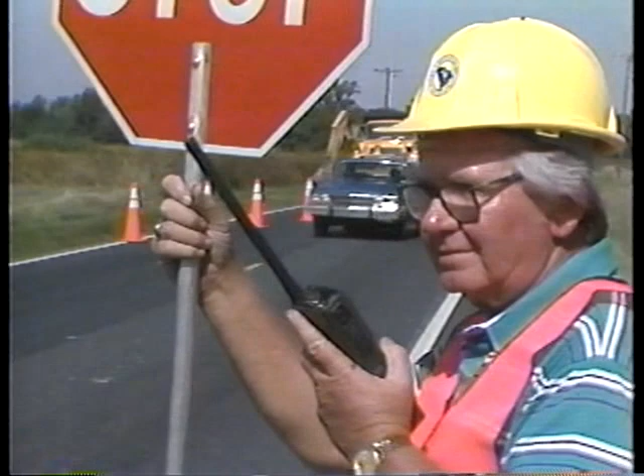Remember, communication between flaggers is vital, and radios are the best way to maintain communication. The third situation is use of a pilot car for traffic control. This method works best where the route is particularly long or dangerous, or where the work area changes so often that proper signing is difficult. The pilot car is used to guide a train of vehicles through the job or detour.

This operation uses a flagger at each end of the one-lane section. In this type of operation, the flaggers hold all traffic on each end of the work zone until the pilot car arrives and leads the traffic through the work zone. A safe turnaround location should be provided for the pilot car at each end of the work zone. Provision should also be made for identification of the last vehicle in the column.

The vehicle selected for the pilot car should be lightweight and easy to handle. It should have the name of the agency or contractor clearly displayed. The pilot car sign shall be mounted on the rear of the vehicle. 2 or more pilot cars may be used to guide traffic through a particularly complex or dangerous detour.

The fourth situation is nighttime flagging operations. These procedures are generally the same as daytime, except for some equipment changes. A flashlight with glow cone is recommended, while a retro-reflectorized vest and a retro-reflectorized stop-slow paddle are required for nighttime flagging operations.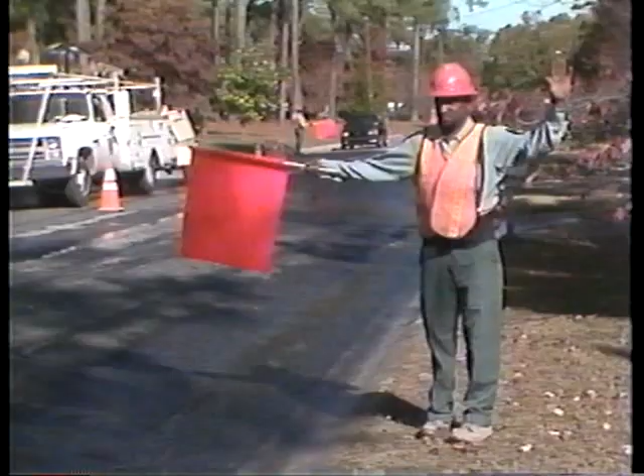In emergencies, your first priority is to warn the public of the hazard. To stop traffic, stand on the shoulder of the road and extend the flag into the roadway. Raise your other hand to the stop position. To release traffic, drop the flag to your side and with your free hand, motion traffic to proceed.

Do not use the flag to motion traffic through. This confuses the drivers. To alert and slow traffic, the flag should be waved from the ground to shoulder height. As soon as the proper equipment is available, the stop-slow paddles should be used.

Now let's summarize the 6 flagging situations we've just discussed. Single flagger operation. This operation is acceptable for low volume conditions where there is good sight distance and the work area is short.

Two flagger operation. This is the most common flagging procedure. A flagger works on each end of the work zone to control the movement of traffic through the work area. Good communication between flaggers is critical during this operation.

Pilot car operation. This method is used when the work zone is particularly long, dangerous, or complicated.

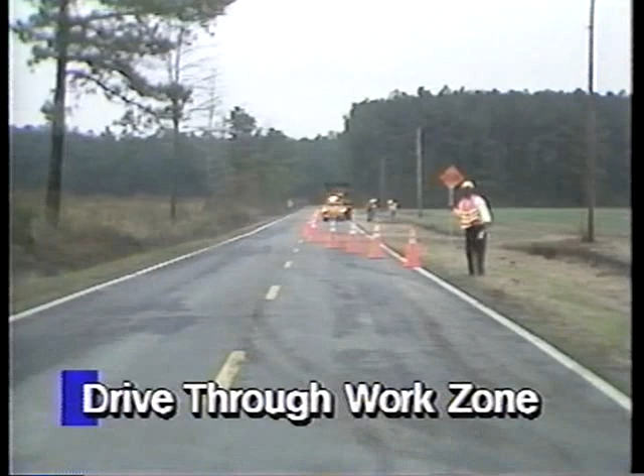Drive through the work zone and observe the flagger's operation. Close calls or skidding mean that the flagger stations need to be moved or that other problems exist. Signs should not be left up after flagging is completed. Remove, fold over, or turn away the flagger and other inappropriate signs when flagging is no longer being performed. Do not mislead the public.

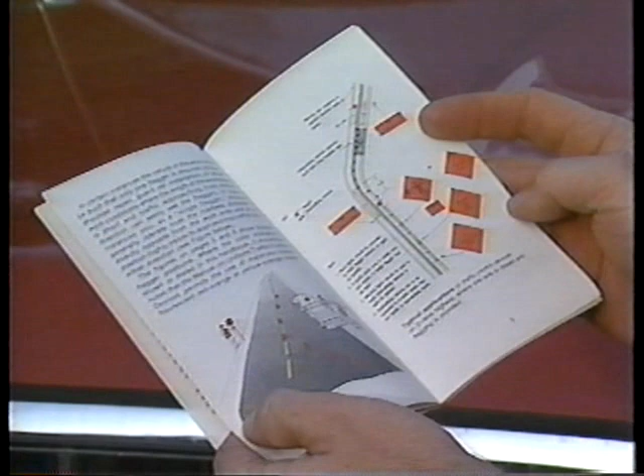Flagging is one of the most important jobs in any construction, maintenance, or utility operation. It is also one of the most dangerous. However, with proper training, equipment, and procedures, flagging can be safe and effective.

Hey, did you go fishing last Saturday? Yeah, sure did. I didn't have any luck, though. Missed a couple of nice ones. Caught one little old scrawny bass, about a pound and a half. But when that wind came up, buddy, we came in.

Hey, let me tell you, that wind caught me halfway across the lake. I thought I'd never get back. I did get 3 bass, though, so it was worth the trip. We fried them up when I got home, and man, they were good.

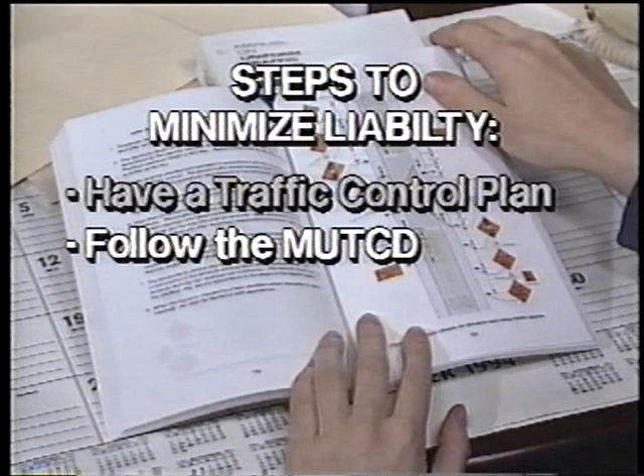Third, try to use a work strategy that minimizes disruption of traffic flow. In particular, try to minimize the amount of time that workers and equipment are on the roadway. Also, don't expect all drivers to slow down at work zones, even when a reduced speed limit is posted. You must make work zones safe at prevailing traffic speeds.

Fourth, promptly remove any traffic control devices which are no longer needed. Fifth, all personnel who install traffic control devices should receive training on the Manual on Uniform Traffic Control Devices and safe traffic handling procedures. Flaggers should receive prior instructions on proper flagging techniques.

It's also very important to inspect work zones to discover damaged or missing devices and to identify safety problems which may develop. Now, a good inspection program includes the following elements.

Day and nighttime inspections are essential, and they should be regularly scheduled. The number and frequency of inspections will depend on the location and type of work. Holiday and weekend inspections are also important since traffic accidents don't take a vacation.

It's desirable to use an inspection report form. The report form will provide a record of your efforts to ensure safety, and it'll provide a checklist of items to look for. During the inspections, be on the constant lookout for potential safety hazards.

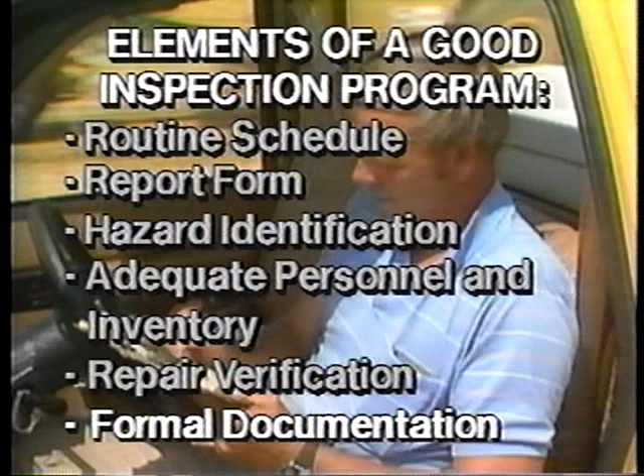Not only is it important to keep written records of inspections, but it's also very important to record key items of information about every work zone.

These include the starting and ending time of work, the location of the work, the type, condition, and position of traffic control devices, the names of personnel and the types of equipment used, and any changes in temporary or permanent regulatory traffic control devices. These items can be easily kept in a supervisor's or foreman's diary, even for small maintenance projects.

It is recommended that more detailed information about work zone conditions be gathered and documented whenever there's an accident anywhere near the work area. This additional information could prove useful in the event of a lawsuit, and more importantly, it may help prevent future accidents.

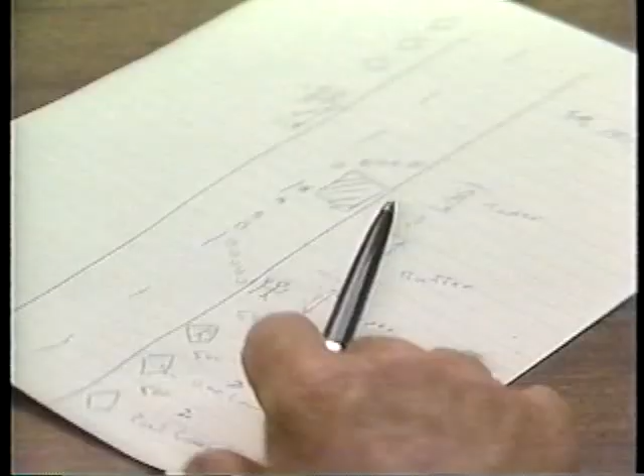All right, this is kind of the basic way you're gonna have to set that thing up down there. Yeah, and I don't think you'll have any problem if you set it up like this. Go to your manual and set it up kind of like this. That's what we got it sketched off of.

You do have a manual. We've got a manual on our truck, just like that. I always refer back to your manual. This is how we got it sketched here. If you run into any kind of problem, just go back to your manual, that's the basic way you do things. That's what I do. Okay, I don't foresee any problem with it.

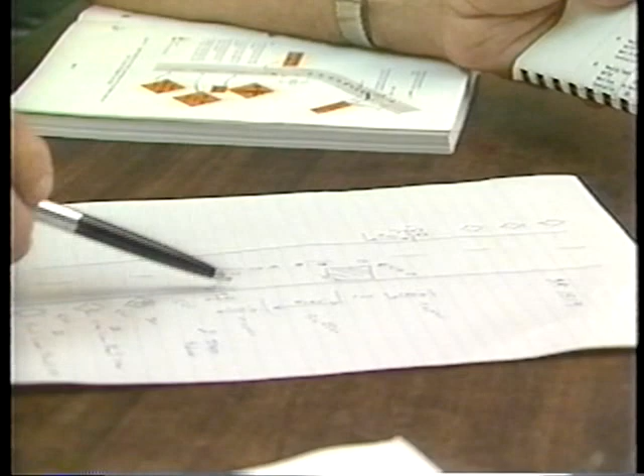You're gonna have to taper this thing now, like here. We're gonna have a 400-foot buffer in here. Okay, 400-foot buffer, all right. Yeah, just tape it off kind of like you see it right here. Just come back 400 feet away from this job site. That's the reason I kind of sketched this off for you here, so you can see 400 feet. Work that out, all right.

Okay, now you're gonna need 2 flagmen. I have to have 2 flags. We can get an extra man from maintenance for us. I think we can take care of it, okay? We'll check with them over it, and see if I can get a man from maintenance. If they can't give you anybody to help you, get back with me. I'll be around, and I'll get somebody to help you.

I want you to look at this now and see if there's anything you think we've left out that we need to do. I don't see any problem with it. Don't forget to have your taper, your buffer, back far enough, at least approximately 400 feet, to keep the people working in there safe in case someone does run through. Okay, if I see any problem, I'll check out my material this afternoon. If you run into any kind of problem, don't mind calling me, I'll be glad to help you with it. Okay, we'll have that planned for next Monday morning at 8 o'clock. That'll be fine.

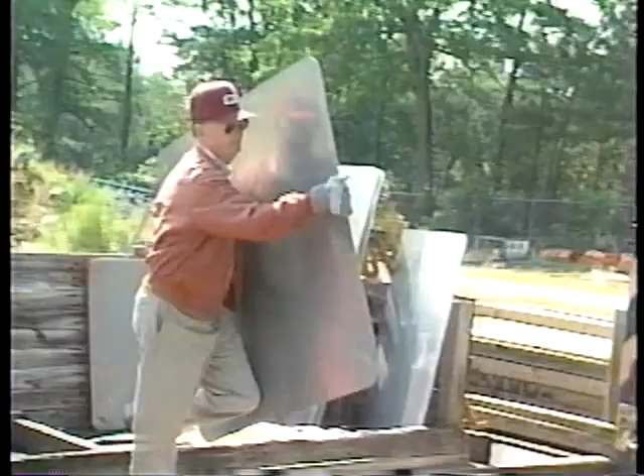First thing in the morning when we arrive at work, if we've got a work order from our supervisor in Wilson, we'll first fill our sign order, what we have to go out with and our equipment to work with. We load our posts and proceed from the maintenance yard to the work site, and depending on whatever the situation may be, that's what we work on.

Signing is a pretty important job. You've got to make a decision, first of all, what type of sign you're putting out. And then the next thing is the location of where it's to be located - the right footage from the road, getting it out of the traffic area, considering people's driveways, different places you have to decide where the sign is to be put.

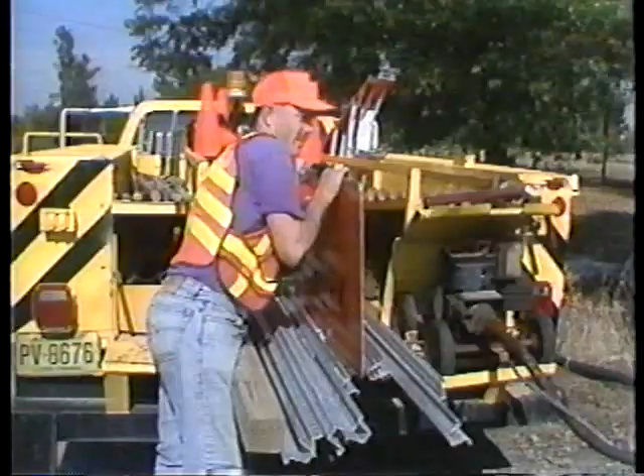Well, once in a while you get in heavy traffic and you wonder how you're going to work that particular zone, but most of the time on secondary roads we can handle it pretty good. See, we don't have any signing for our truck at all. All we've got is a safety flashing light and our safety blinkers, and that's basically all the safety we have other than our hard hat and vest. We have to sort of look out for the traveling public as well.

You know how the public is - generally they just try to get by as fast as they can and keep going, try not to slow down if they can help it. The average person doesn't really pay a lot of attention to the signs, but some of them do, and it's important that they see these signs and heed the message they're reading. If they don't, there could be some instances of death involved if there were not signs involved.

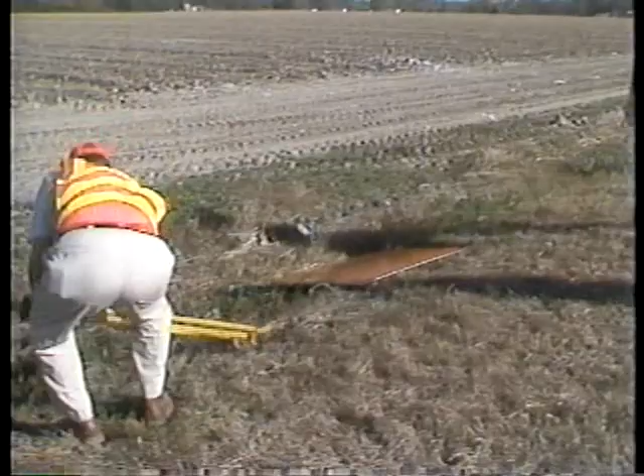Safety is the most important thing of the road operation. Safety comes first, and signing is one of the most important things on the road. You've got to have your signing for your work area set up in a manner so the public can see it well in advance of the work site, and it needs to be laid out properly. I just think that's one of the most important things on the job, is safety.